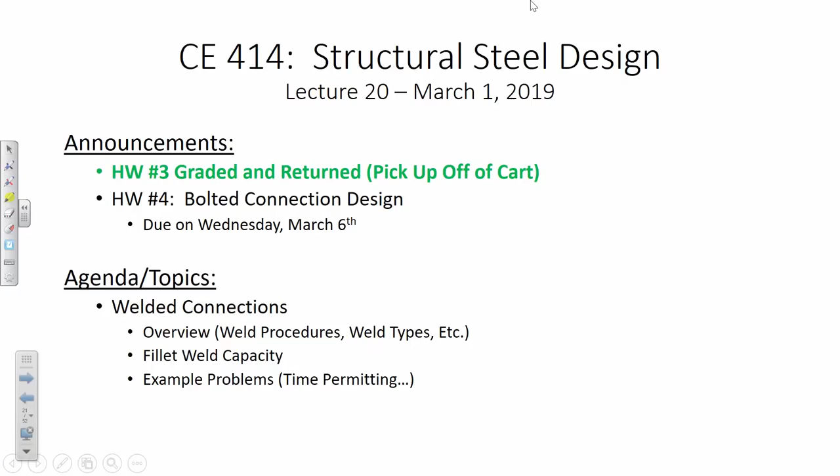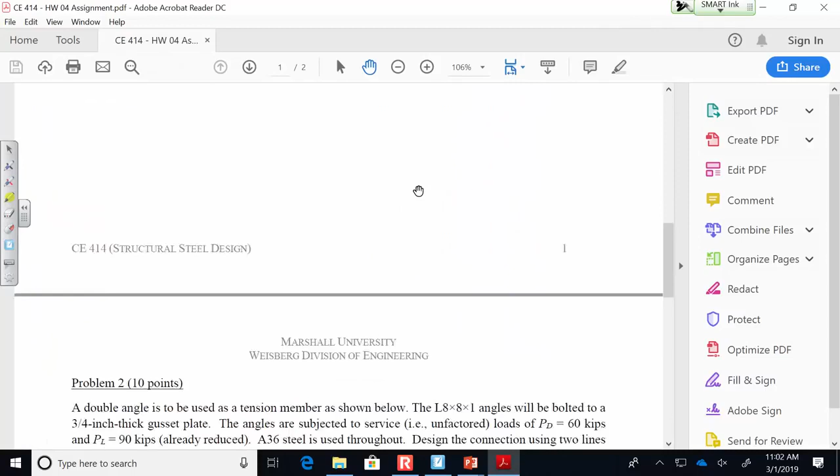Okay, so the second question here, I'll go ahead and pull up the homework assignment so everybody sees what we're talking about.

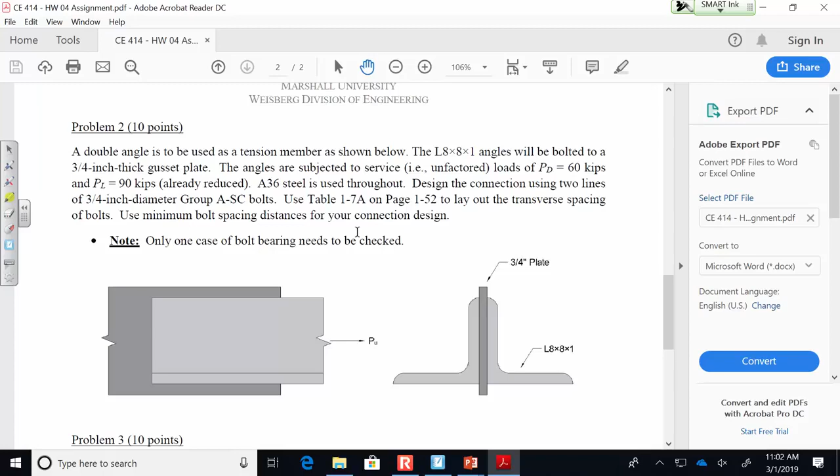So it's table 1-7A on page 1-52 to lay out the transverse spacing of your bolts. I'll be honest, that really doesn't entirely affect the design. So you're going to design the connection using 2 lines of bolts, let me see if I can explain what I meant by that.

Let me open up the Word document so I can copy the image.

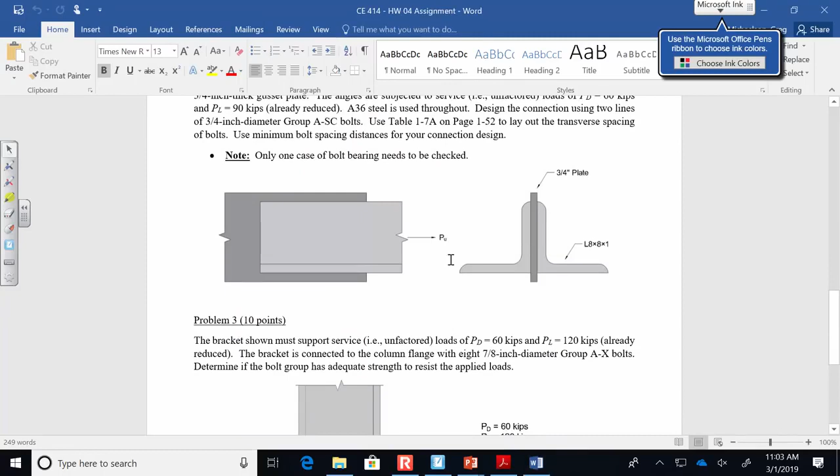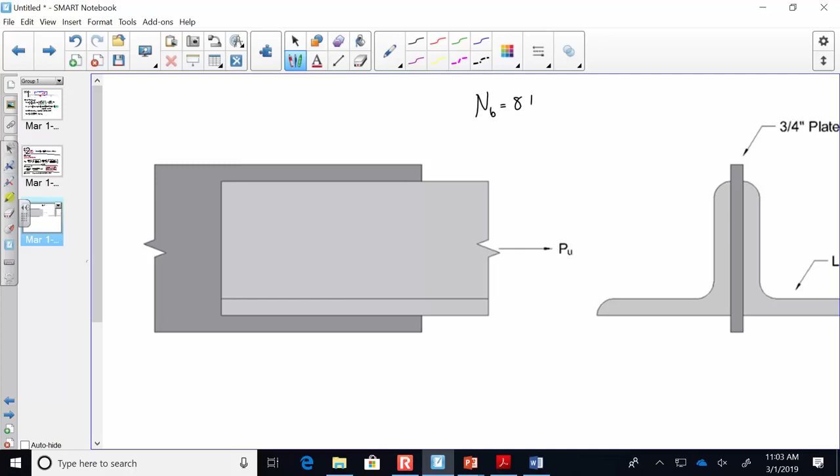For that problem, I'll be honest, I don't remember the number of bolts, so please don't take this as him saying there were 8 bolts, that's not what I'm saying. But let's just say for the sake of discussion that you end up using 8 bolts. The problem stated that you are to design this connection using 2 lines of bolts.

Now let's go back to terminology. Who remembers which way a line of bolts runs? Parallel to what, the stress, right? We're yanking on this thing left and right, so our lines of bolts are going left and right.

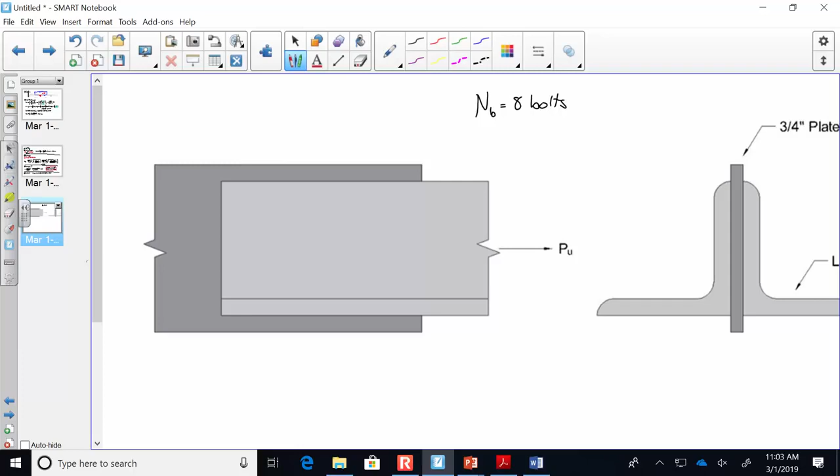So what this problem is stating is that we're going to use 2 lines of bolts. So one's going to be something about like that, and one's going to be something about like that. If we were using 8 bolts, it would be 1, 2, 3, 4, 1, 2, 3, 4.

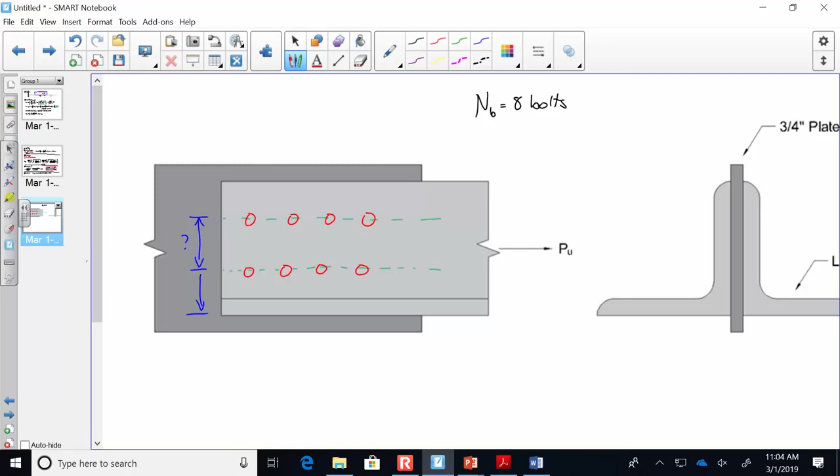Now, as for how far apart those bolts should be spaced, or from the edge, you got to figure that out. But what you might not know, and the reason for that note is, well, you have 2 lines of bolts, but what's this distance and what's that distance? And that's what that table was for, table 1-7A on page 1-52.

So if you go to that table, it's right before the WT section, right at the end of table 1-7. You'll have workable gauges and angle legs. On the top row, it says leg, and it says 12, 10, 8, 7, so those are the leg sizes.

So this problem, what was it? Was it an L4, 6x6? What was it? 8 by 8. Okay, and so if you have 8 by 8, and we have 2 rows...

You look over here on the image, and so we're going to use G1 and G2. For an 8-leg angle, what are G1 and G2? Does everybody see that? They're 3, right? This is page 1-52.

They're 3, so this distance is going to be 3 inches, and that distance is going to be 3 inches. Those are just workable gauges for the purpose of fabrication, and I put that note in there so that everybody would have that dimension.

Now, I'm obviously not giving you these dimensions this way, like that distance, because you can determine those through the course of designing your bolted connection. But those 2 you didn't have right offhand, so I just said, well, I'm just going to go ahead and give them to you.

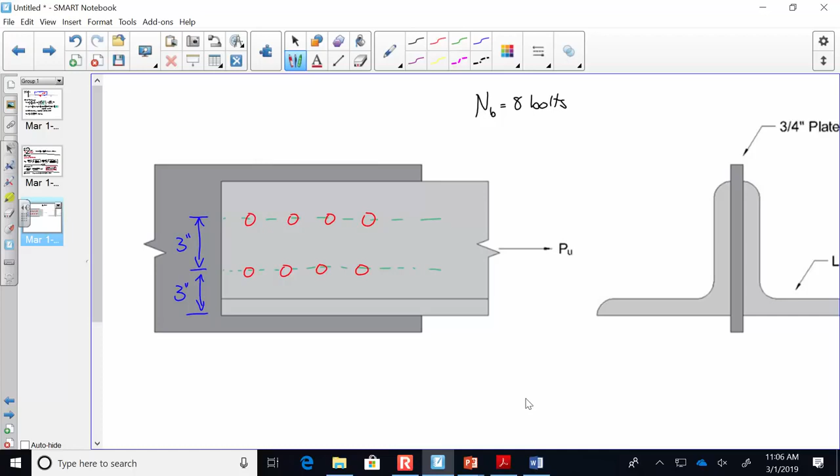Okay, now I was mentioning this earlier in class, but I really wasn't kidding. We're going to start talking about welds, and I think you'll find there's some terminology and things you need to be aware of, but really, of all the topics we cover in this class, this one's the easiest. It really is. So let's talk about welds.

I'm just curious about something. How many of you have ever welded anything? I know a few of you have, recently with the steel bridge, you went to that DOH training workshop on welding. Who would say welding is easier than bolting something together? Nobody, right? Welding, I don't even like to say it's a skill. Welding's an art form, man. It takes work. It really does. See, me, if I have a slightly mediocre weld, I'm having a really good day because it's not good. I can take piece of steel A and piece of steel B and hit the electrode on it until they're melted together. And out of maybe 10 welds I deposit, maybe one or two look good, but I'm not good, I'll be the first to admit. Just keep grinding it until you get it right.

It's funny you mentioned that because I'm going to bring up something about that here in a second. But yeah, welding is a skill. I'll say this: if you spend the required time, put in the required practice, and get the certifications necessary to do something like be a welder on a nuclear submarine, you're going to make some cash, let me tell you. Welding is such a difficult skill to pick up right off the bat. It takes time to learn, it takes effort. Welders do pretty well, they can make some serious change. So it's a very, very decent career.

I want to talk a little bit about welding to give you all an idea of how welding comes about, the different types of processes we use in engineering, the different types of welding joints we have, how we determine capacities, and so on and so forth.

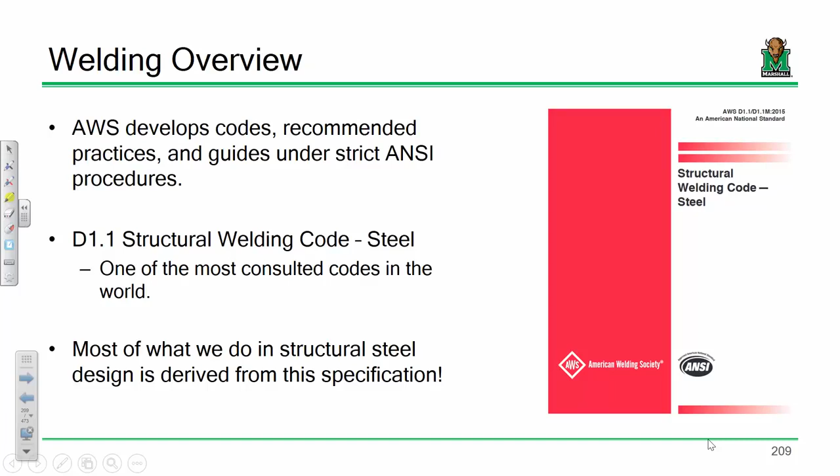I think I would be remiss if I didn't at least mention D1.1. We're not going to use D1.1 directly, but a lot of the codes and provisions we use come from the American Welding Society's D1.1 Structural Welding Code for Steel, one of the most consulted codes in the world. Most of what we do in structural design comes from this. We take a lot of the mechanics and material specs from AWS, then put our LRFD spin on it. But in the end, a lot of this theory, procedures, and whatnot comes from documents like this. First, I want to talk about welding procedures.

Now let me be clear, I'm talking about welding procedures used in structural applications. So one thing you won't hear me talking about is TIG welding or something like that, because we're not talking about welding in automotive applications or some other mechanical system. We're talking about the types of welds we deposit for buildings, bridges, transmission poles, and things like that—large-scale systems and the type of welding we do there.

Now, some of these terms you probably have never heard before. You probably never heard of the term shielded metal arc welding, or gas metal arc welding, or flux core arc welding. However, when you look at the method and go, oh, that's MIG welding or something like that, you'll kind of see what I'm talking about. So these are the scientific terms for the four fundamental methods we use in structural engineering.

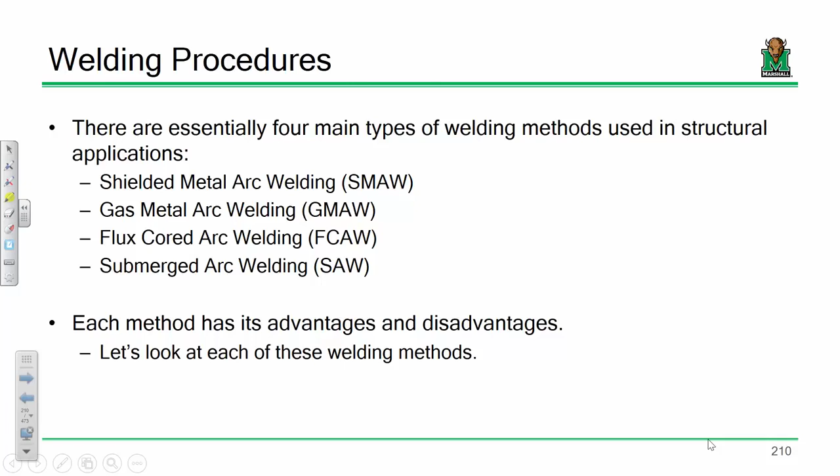The first is shielded metal arc welding. You've probably never used that term, but if you've ever been around welding or done any welding, you've probably heard of stick welding. Everybody's probably heard of stick welding, and it's one of the two most common types of weld applications done in large-scale structural systems, the other being MIG welding, okay?

Although I would argue that if we're doing large-scale welds, stick welding is still predominantly the most common. The idea is that you have one end of your lead attached to the member, the other end attached to a combustible or consumable electrode. Once that electrode comes into contact with your joint, the electric circuit is completed, electricity begins to flow, and that electrode begins to melt.

Right at the point where the circuit is complete, you've got a lot of amperage flowing through that point, so much so that you essentially create three molten pools of metal. You're melting the electrode as well as the two components that you're welding together, so you get a big molten pool of metal. Once that cools, those three molten pools solidify into one joint.

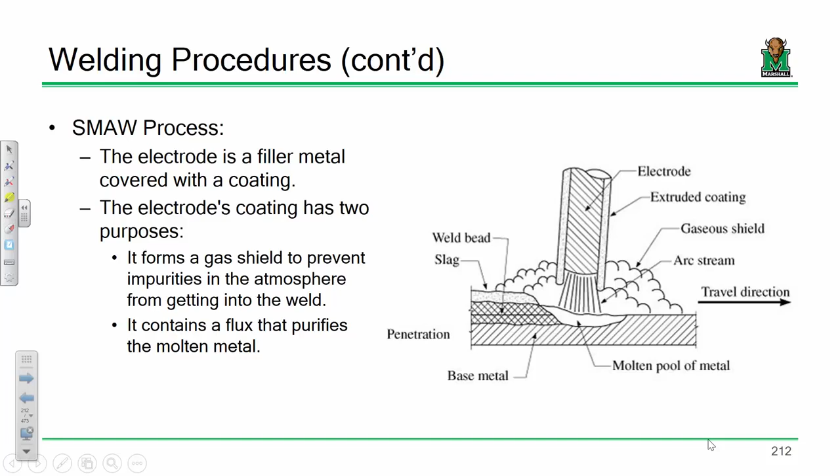The other one that's probably most familiar to everybody - if you've done welding back home, or your parents have this in the garage - you probably have something like a MIG welder. Gas metal arc welding, or MIG welding, is arguably the second most common type of welding we perform in structural engineering. The difference between stick welding and MIG welding from a procedure standpoint is...

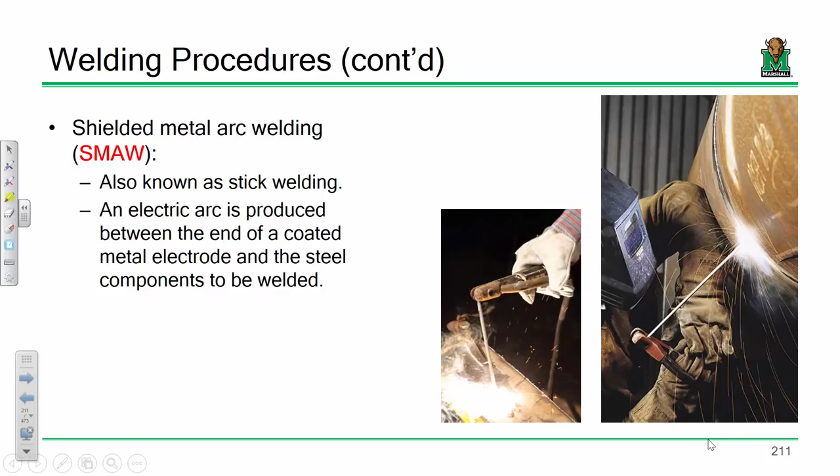Here's the welder with the electrode - once that electrode is consumed, the welding has to stop. You get another electrode and start over. With MIG welding, you have a continuous spool of electrode - you have your gun, you hit a trigger, and that electrode just continuously spits out. So you can sit there and weld all day long as long as you have enough electrode. There's no stop, start, stop, start procedure.

The thing with MIG welding is it's very, very fast, so because of that it's usually a little more economical. The problem is MIG welding does have a bit of a cap in terms of the size of the weld you can deposit and how much weld penetration you get. So if you really need a deep, strong weld, stick welding still seems to be the way to go, unless you're using some type of robotic approach, which I'll mention here in a second.

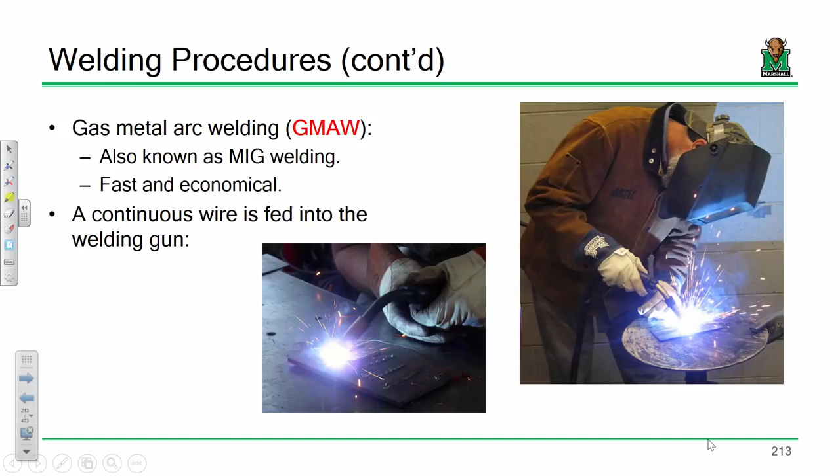In standard MIG welding operations, you have not only your continuous feed of electrode coming through the end of the gun, but you'll also have a gas shield - a big tank of gas. Usually when you're carting around a MIG welder, say around the shop, you'll have not only the base unit generating your voltage and current for the welding, but also a big tank attached that you'll wheel around, because that tank provides the gas shield that neutralizes the hydrogen and any other impurities in the atmosphere.

This is also one thing I'll mention: this is one process that can be automated. If you're trying to do welding with some sort of device or robot, which is becoming more and more common, you tend to see stuff like this used a little bit more often because it's easier to automate.

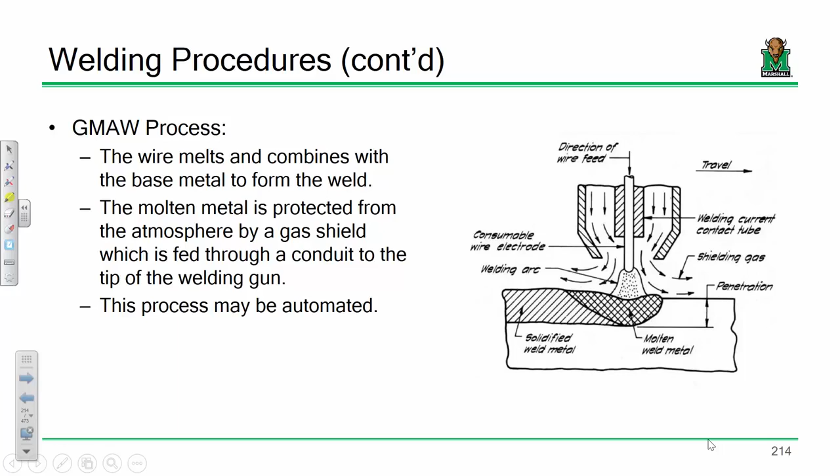If you've got a small Lincoln Electric MIG welder in your garage, it's possible you don't have a big gas shield tank, because instead you'll use what's called a flux core electrode. Flux core arc welding is similar to MIG welding, or the gas metal arc welding process, except the wire itself has a similar coating. You can always tell when a weld has been deposited using a flux core process - whenever you see a flux core weld deposited, there's this white, milky coating around the weld that you have to chip off. That's the coating meant to prevent impurities from getting into the weld.

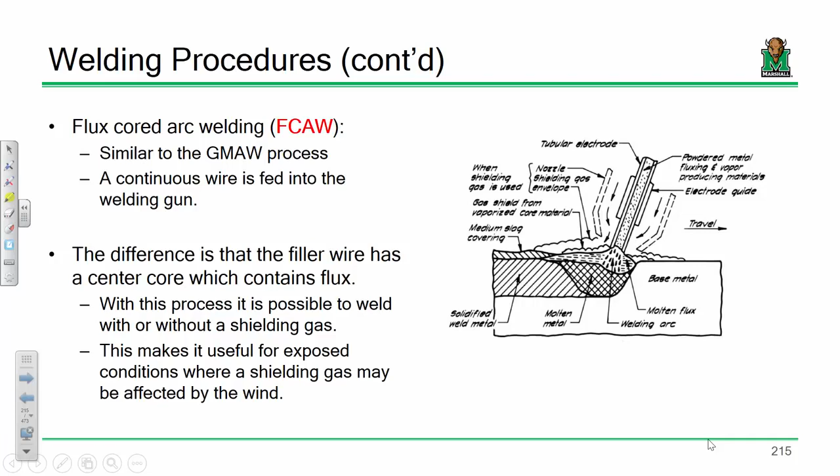The fourth most common process, becoming more common in structural applications, is submerged arc welding, or SAW welding. This is really only performed by an automatic or machine type method. A submerged arc weld is most valuable when you have a long continuous weld, maybe welding a top flange to a web, where you have a single weld going along a long member. Submerged welding works very well there because the QA/QC is very high.

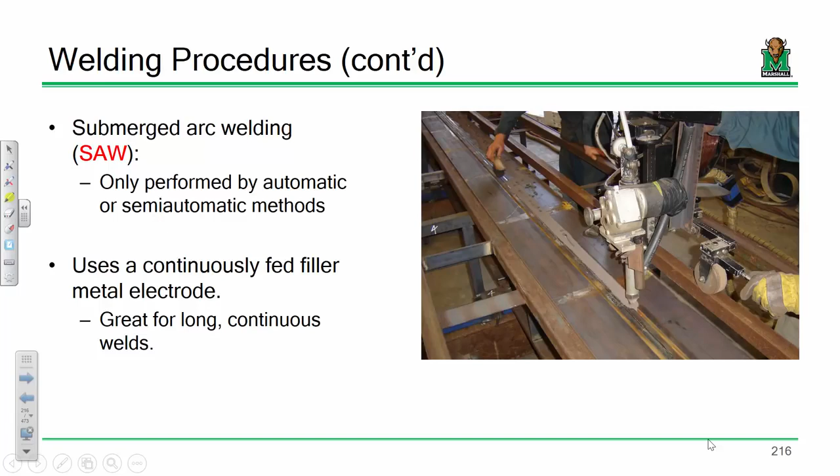What happens is there are actually two nozzles for a submerged arc weld. One in front deposits this granular flux - almost like kitty litter, but finer - and the welding actually occurs under this deposited flux. As the submerged arc weld goes along the girder, you can see that kitty litter, and the weld is occurring underneath it. So you get a lot of quality assurance and quality control with this type of weld, but it's only really appropriate if you have a really long continuous weld.

So is everybody okay with welding procedures? Anybody have any questions on that?

You didn't mention friction welding - what's that for? So with friction welding, you're talking about if you have shaft A and shaft B, and you do that. That is a type of welding, but we're really not doing that much in buildings, like when you're trying to weld a gusset plate to a truss - the geometry doesn't work. It's a valid type of weld we could employ, but it's more appropriate for a mechanical application, like a rotating shaft, a car, something like that. We really wouldn't use it in buildings. There's also the Mythbusters approach where they take two plates and stick dynamite on top - I'm kidding, but in all seriousness, it wouldn't really work for our geometry. So yeah, it's a valid welding procedure, just not for our purposes.

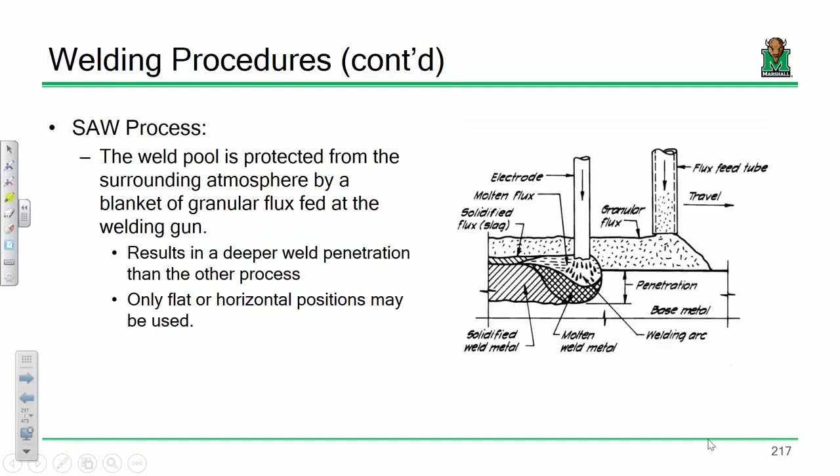Regardless of what welding procedure you utilize, whether it's a stick weld, MIG weld, whatever, there are a few different types of welds you're going to deposit. If you've ever welded anything, what's the first weld you deposit? It's a tack weld. A tack weld is just a temporary weld used to hold the part in place before you place a more extensive weld.

Let's say this is a beam and this is a clip angle with bolt holes going through, and there's a column here. When you transport this beam to site, there's a little clip angle welded to it, so you'll bolt this beam to the column. That means you have to weld this angle to the beam. The first thing you do is line that angle up right where you want it, get all your measurements done - it's like measure twice, cut once, so measure twice, weld once. The first weld you do is just a couple quick hits to place a small weld to hold it in place. Those tack welds are a little big, but in the end you just want that part to sit still.

And then what you'll do is go in, measure it again, make sure everything's good and in place before you deposit your final weld. The idea is if it's in the wrong place, you can grind it off and start over, but you don't want to have to grind it off if the whole thing's been welded. That's just a big deal. So it's really more of a fabrication concern than a design one.

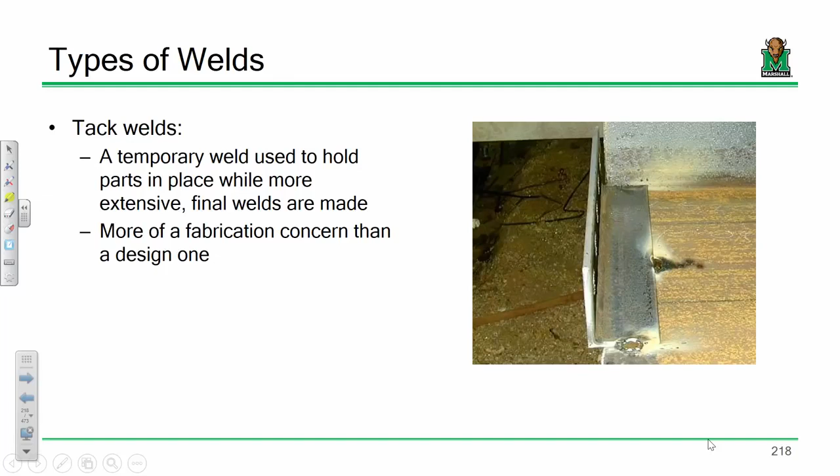All in all, the most common weld placed in structural engineering, period, is the fillet weld. And this is the one that we as structural engineers really need to worry about designing. Roughly 85% of all welded joints are fillet welds, but I'd almost go as far to say it's probably even more like 90% in building and bridge applications.

So you have piece of metal A lapped on top of piece of metal B, and you run a bead of weld along that joint, fusing those parts together. Fillet welds can be continuous, a continuous weld along your connection. It could also be done as a series of shorter welds, here's a weld, here's a weld, here's a weld. We call those stitch welds. So if you've ever seen that, that's what that means. But arguably the most common type of weld is the fillet weld.

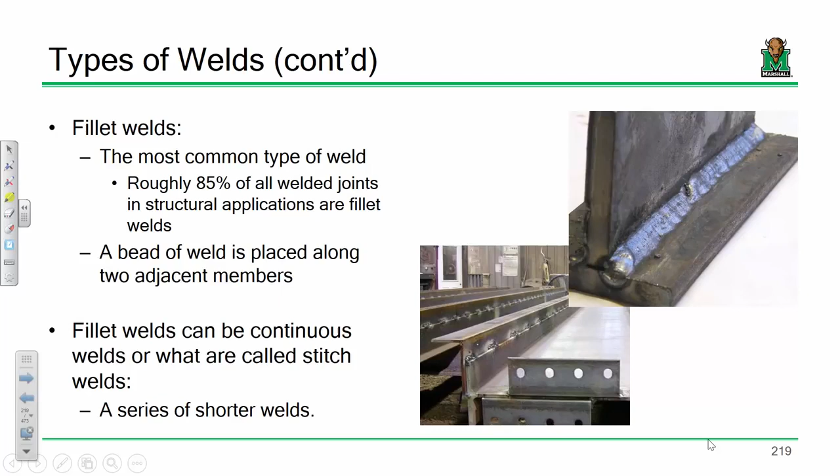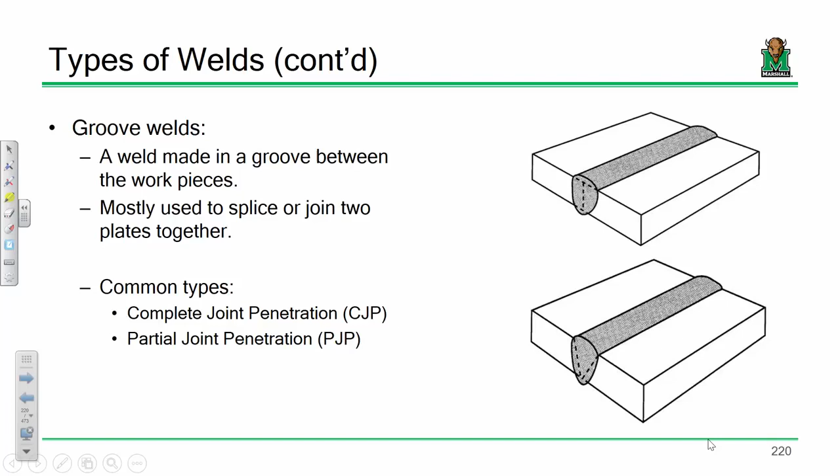The second most common type of weld is what's called a groove weld. You'll probably never hear groove welds referred to as groove welds in practice because there's two different types that people really refer to: either a complete joint penetration weld or a partial joint penetration weld, CJP or PJP. There's really not a whole lot of design associated with groove welds because we spec out that weld such that the capacity is governed by the strength of the base metal, not the strength of the weld metal. In other words, we want the base metal to be the weaker component. So as long as the weld is stronger than that, we're good. That's not really the biggest concern. It is with fillet welds, but not with CJP or PJP.

What's a little less common is something like a plug weld or a slot weld. That can be used to transmit shear when you have a plate lapped onto another plate. One plate has holes drilled into it, the other doesn't. So you lap them onto one another and just fill that with weld metal until you join them together. It can prevent buckling of lap parts and things like that, but in all honesty, it's pretty rare.

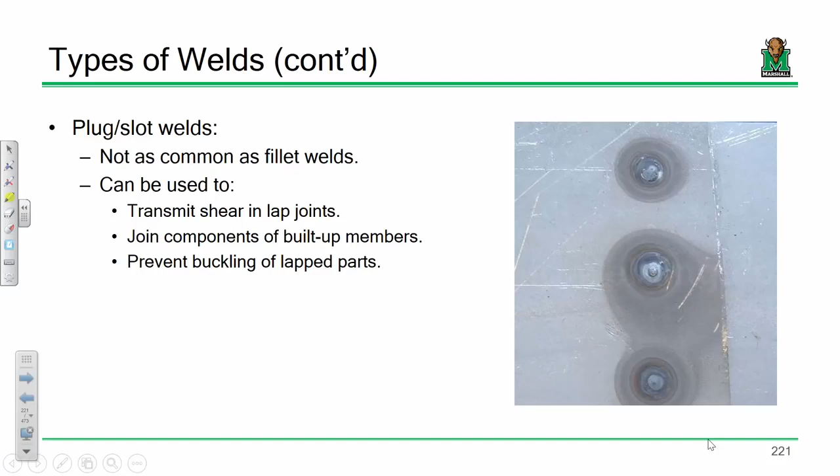Anything else? Now these are the types of welds. We also have to consider terminology—I want to make sure everybody's clear. For instance, a fillet weld could be placed on a lap joint, it could also be placed on a T-joint, or a corner joint. So the joints I'm talking about are just the ways in which plate A and plate B would be put together. A butt joint is if plate A and plate B butted up against one another.

A T-joint or a lap joint—so like a flange-to-web connection would be very much like a T-joint. A lap joint is just lapping two on top of one another, where you have plate A and plate B just lapped on top of one another. And then there's corner joints and edge joints.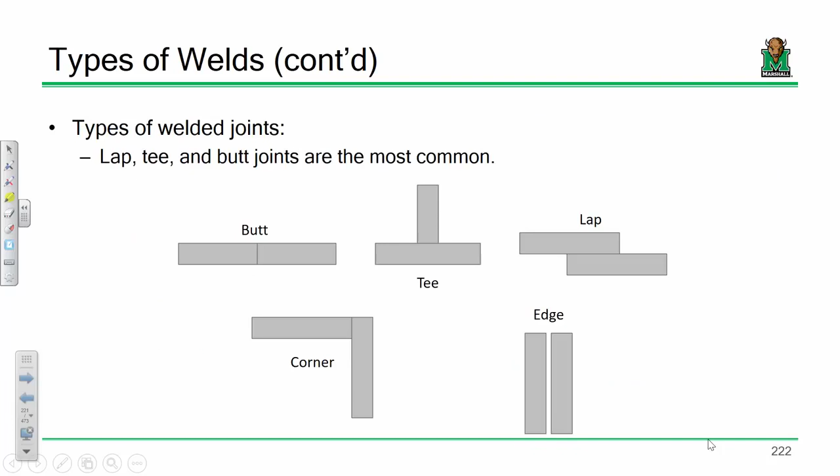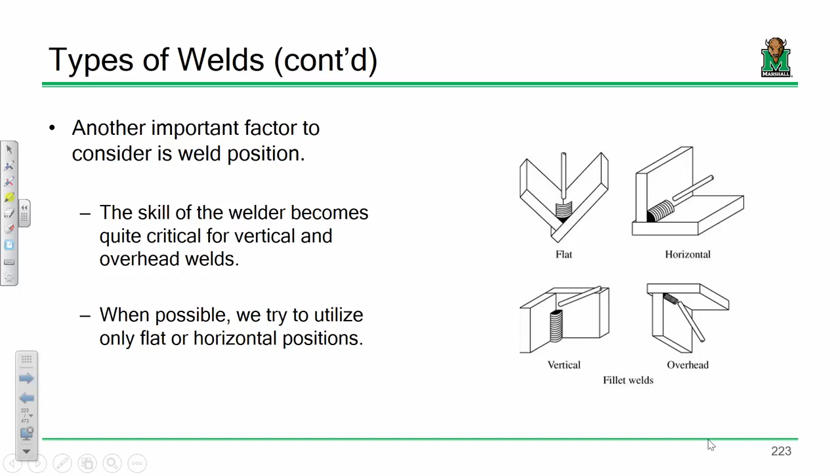Another important factor to consider is the weld position. Anybody who's ever done any welding will tell you that welding in a flat or horizontal position is obviously the easiest. If you have to weld overhead or in a vertical position, it makes the welding process much more difficult because you have to ensure that hot molten weld metal doesn't drip on you. It's pretty difficult. When you start getting into vertical or overhead welding, that's really where the skill of the welder comes into play. So if you're in the shop fabricating pieces of steel for a project, you want to try and use flat or horizontal positions as much as you can. Sometimes that's impossible, but we're really trying to avoid vertical or overhead whenever we can.

Now, has anybody ever seen drawings that show welding, like weld details? They can be nuts, can't they? There's arrows and symbols all over the place, and it can be really complicated, especially when you get into mechanical engineering projects. We're not going to worry about that in here, but there are a couple things I want to show you so that you're aware.

The two weld symbols that I want you to be aware of are this and this. Let me explain what's going on. If I have a weld symbol like this, it's a 1/4 inch, it has this triangle and there's a 6. The 1/4 inch indicates basically the size of that weld, and depending on the electrode, speed, and amperage, the welder can specify the size of that weld pretty easily. So 1/4 inch, that's what that is.

The triangle indicates that it is in fact a fillet weld. You can see that if you were having a plug weld or something like that, the symbol would change. Fillet welds are obviously going to be the most common. If you have a single triangle on the arrow side, that means the weld goes here. If you had two triangles on either side, that means the weld goes here and there. If all I had was the upper triangle, that would mean it would go right there, but that's very uncommon—you just put the arrow where the weld's going to be.

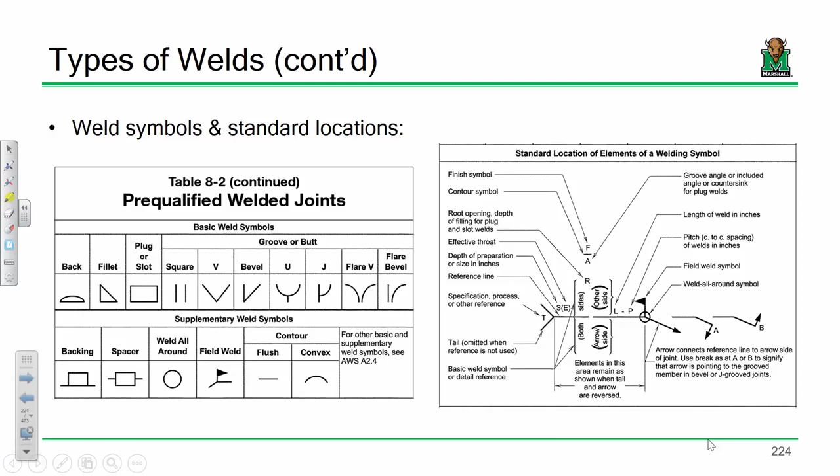I'm not wanting you to memorize everything. I just want you to be able to draw this. So when we do calcs and problems in here, the welds are going to be specified like this. Is everybody okay with that?

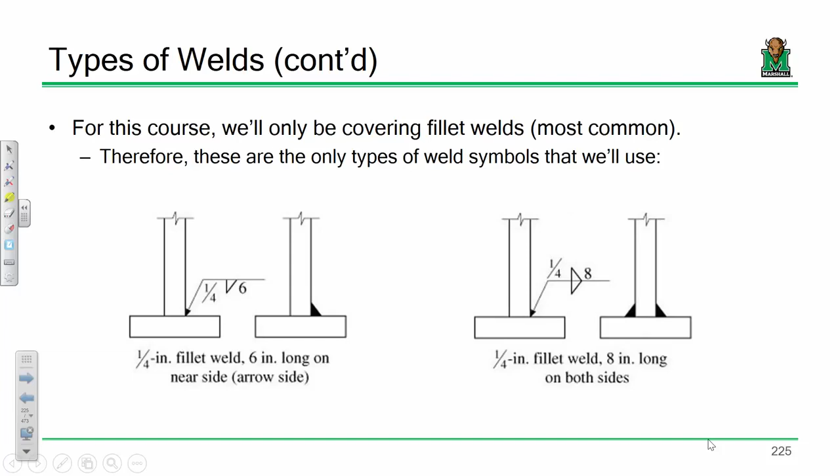Okay, let's talk about the math. Let's talk about the capacity. In this course, I'm only going to focus on fillet welds because they are the most common. And what you're going to find is that the capacity of a fillet weld is really easy to compute if you understand some basic mechanics.

The first thing you need to understand in terms of mechanics is this term called the throat, or the effective throat, of a weld. The effective throat of a weld is basically what defines how strong the weld is. So when we compute capacity, we assume two things: number one, we assume that the capacity is defined by the area of the effective throat. The effective throat is the distance from the root of the weld to the face of the weld.

The second thing is that regardless of the weld orientation, we always assume that the welds are going to resist loads that are transferred through a shear force. Whenever you hear the word shear in structural steel design, a certain number should pop up in your head. What number is that? 0.6, right? Because remember, the von Mises yield criterion states that in shear, the nominal capacity is about 60% of the nominal stress. Is everybody okay with that?

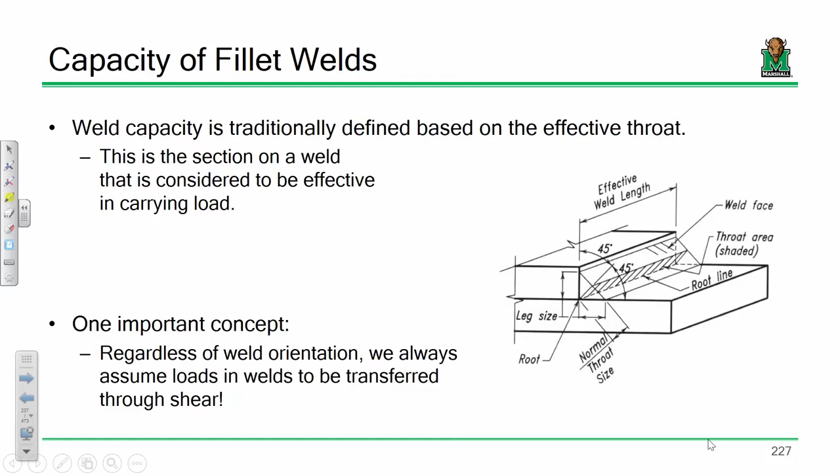I'm sorry, I'm getting ahead of myself.

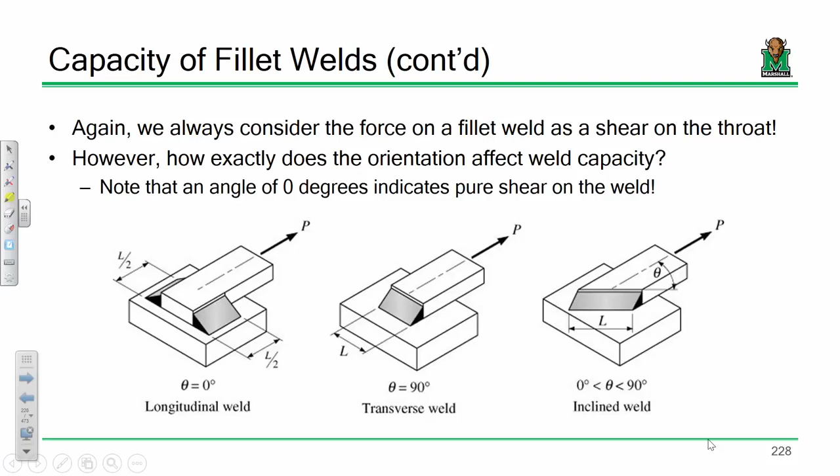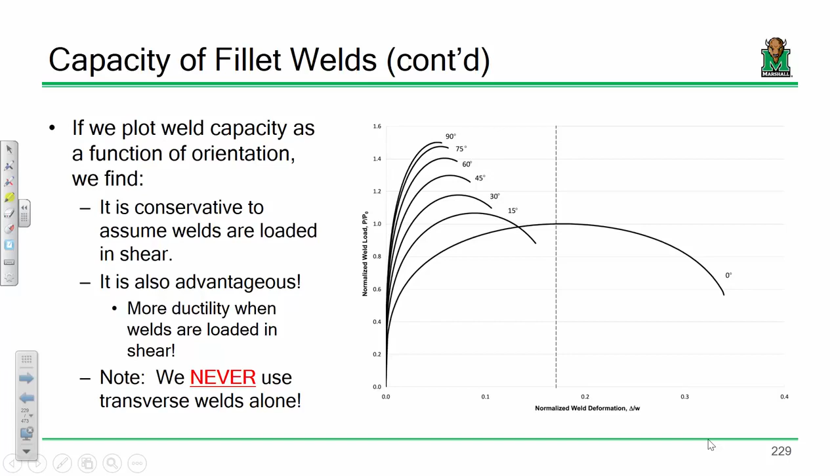Don't ever design a welded connection with only transverse welds. There's no problem with combining longitudinal and transverse—that's fine, there's no issue with that. But if you have a connection with only transverse welds, that connection is very, very brittle. Once it fails, it's going to fail quick, and you can just see that here. So we never use transverse welds alone. You can use a transverse weld with a longitudinal weld, but yeah.

So let's get back to capacity, okay? And we'll cover this, and then we'll probably call it. So like I said, the capacity of a fillet weld is determined by this dimension, the effective throat, which is defined as the distance from the root of the weld to the face of the weld. If you trace this, this, and this, that's a 45-45-90 triangle, and since I know the weld size by that distance A—we use the letter A to define how big a weld is—if I know A, I can determine that distance just by using a little bit of trig.

What's the sine of 45 degrees, or the cosine of 45 degrees? It's 1 over the square root of 2. So typically when we compute that capacity, we just use the term 0.707—if you see this 0.707, it's just the weld leg size times that, which tells us the distance from here to here. So that's the effective throat. And what we do is take the effective throat times the length of the weld, which gives us the quote-unquote area.

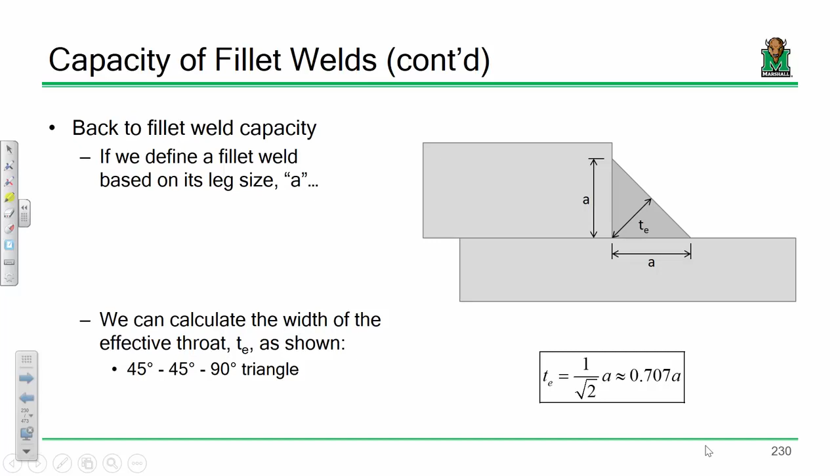Is the weld metal going to fail or the base metal going to fail? We take each one of those independently. Now, the equations are defined out of section J2.3 or section J2, but really, the equations don't matter a whole lot, because what this area is and what this nominal stress is, and what this area is and what this nominal stress is, depends on what you're looking at.

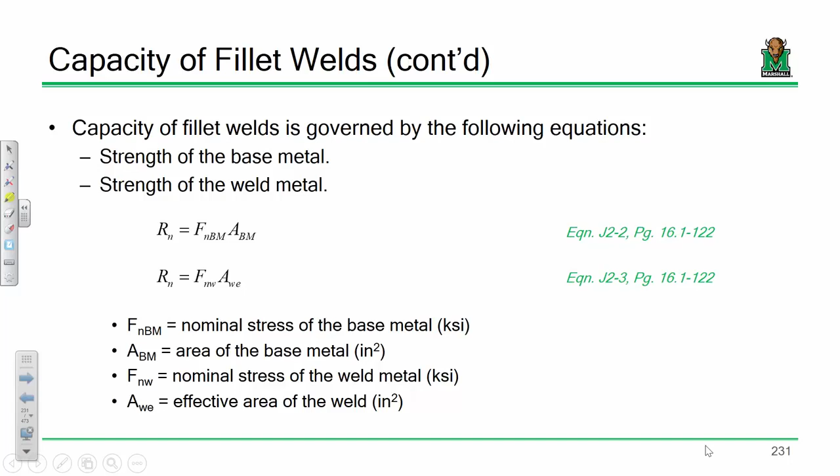So what I want everybody to do is turn to table J2.5, okay? Now this is in the back, this is in the spec. We're in chapter J, so you should already have a tab around chapter J, because that's where the bolt provisions are. Chapter J3 or section J3 is on the bolts, J2 is on the welds. I know everybody brought their AISC 15th edition steel construction manual. I want everybody to turn to section J2.

If you're turning through J2, you should see a few different tables right off the bat. You should see effective throat, J2.1, effective throat of flare groove welds, PJP welds, so on and so forth. But what I want you to do is turn to page 123, so 16.1-123. You should see a big table that says available strength of welded joints. Is everybody there? Everybody that brought their AISC 15th edition steel construction manual, right?

I'm looking, I see a few. All right, so 16.1-123. Right off the bat, I want you to look at some of these entries.

So the first row, remember how I said that groove welds, or for instance CJP groove welds, how the tension or the capacity is really controlled by the base metal, so there's not a whole lot of design when it comes to the weld. That's kind of what's going on here. So we have CJP welds, we have PJP welds, but if you turn the page, we have fillet welds. If you turn to 16.1-124, we've got fillet welds.

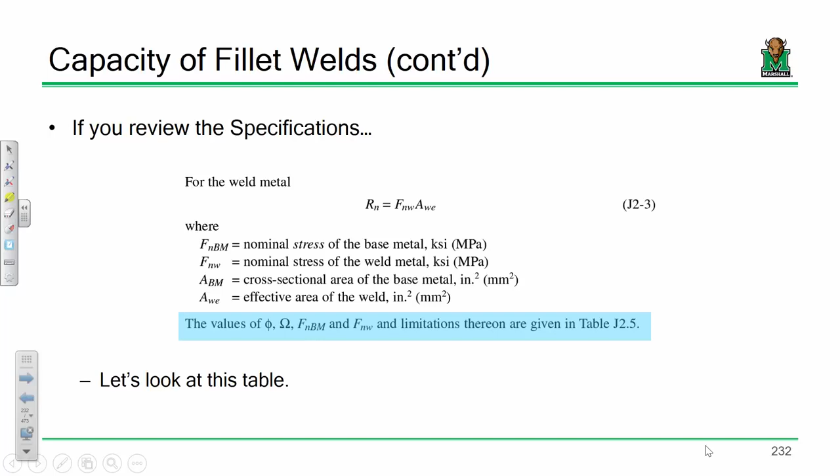In fact, what you should be looking at is something like this. Does everybody see this? Everybody with me?

So first off, there's a couple things that show up. Let's talk about the phi value. The phi value is 0.75. If you're wondering what omega is, phi is for LRFD, omega is for ASD, allowable strength design. We're ignoring that, we don't need to worry about it. What about the nominal stress? What's going on with the nominal stress? What number do you see pop up?

0.6, remember we're talking about a capacity in shear, okay? What do we see for the effective area? Well it says refer to section J2.2a. If you read section J2.2a, it says the effective area of a weld shall be the length multiplied by the effective throat. Now what's going on with this FEXX? FEXX is the filler metal classification. So for instance, if you go to Airgas and buy an E70 electrode, that electrode has a nominal strength of 70 KSI. You buy an E60 electrode, that's going to be 60 KSI.

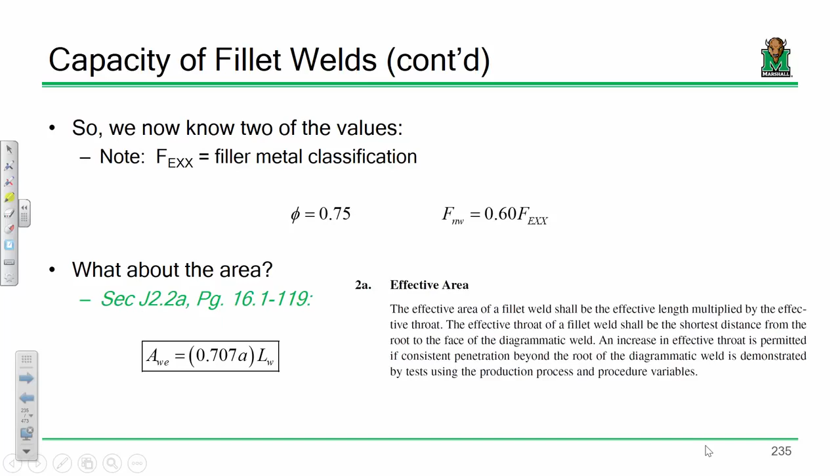So that's just dependent upon what electrodes you buy at Lowe's or wherever. So the effective area of the weld is the effective throat, 0.707 times the length. We know the nominal weld capacity and we know phi, so phi RN for a weld is pretty easy to compute. All you need is the classification of the metal, the length of the weld, and the size of the weld. That's it, it's a pretty plug-and-chug expression. Everybody okay with that?

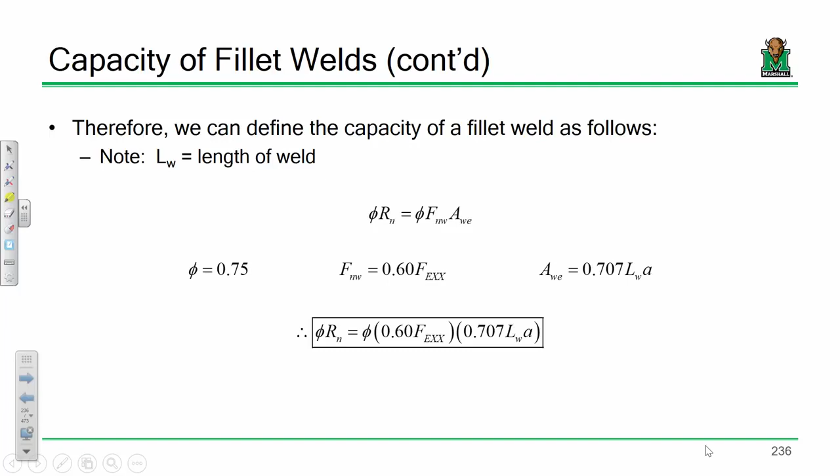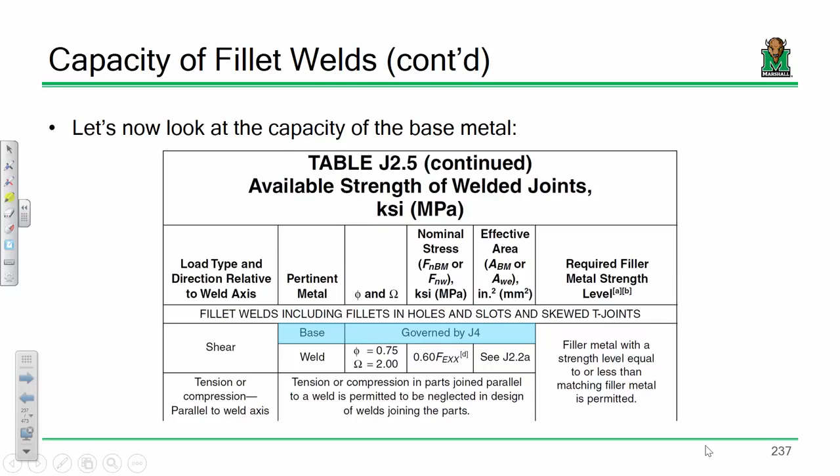Now when we get to the base metal, that's governed by section J4. What I'm going to do is this, we're running short on time, we'll cover that next time. However, if you open section J4, you're going to find that this is a pretty straightforward process, and like I said, this is pretty easy. I'm running out of time, so we're just going to call it.